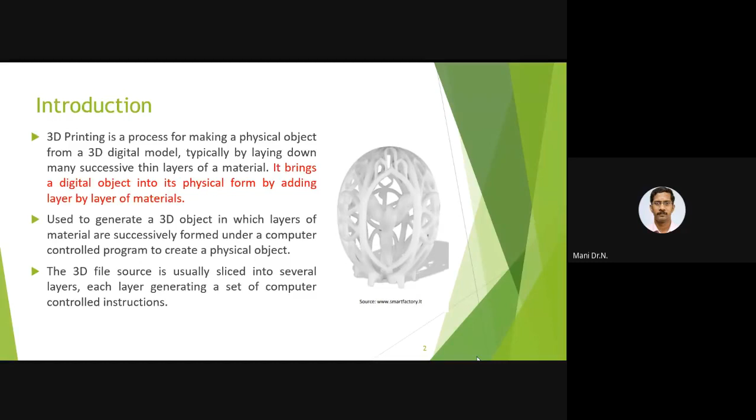Based on the code, nowadays some processes are linked with Python. Similar to what happens in finite element analysis software, where coding happens behind the screen. Whatever appears on screen, if you make a line by giving coordinates, it makes a line. The same applies here. We have to write that program, feed it to the computer, and those details will be delivered in the form of the product at the final stage.

These are possible issues while making the process. If you make any process, even in a normal mechanical engineering workshop, we face a few problems. So same way here also we have some issues.

Normally to make the product, if it is a completely closed product, you will not get much problem. If it is slanting or at some angle, we have to give some support to the part. Those are overhangs or support structures at the end of the model. After making the entire model, we have to remove those support structures, so there we may face some problems, in making the support too.

Then there's the direction in which the print is going, because we have all three directions X, Y, and Z. Normally this process will take only XY directions, because the nozzle that delivers the ink will move only in the XY direction. So each and every layer will move in the XY direction, and finally we'll get depth. So which direction it has to move, we have to give clear instructions. That is also one of the possible issues.

And if it is a hollow object, what do we have to do? We have to fill it with some support materials. We cannot do it just like that. Initially we have to decide, based on the product, what type of product we are going to make.

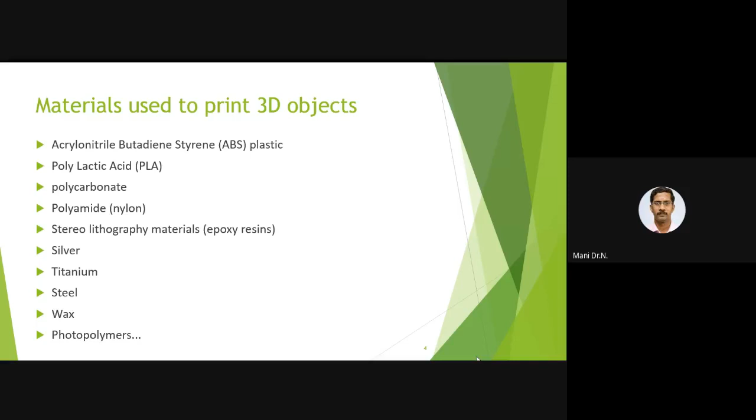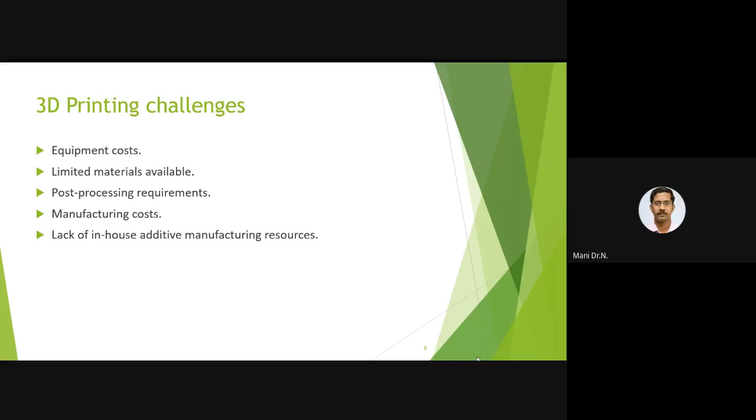Because normally with 3D printing we used to make only a single product, right? Because we need some prototype model, we used to make a single product. So for that we have to go for an entirely new setup, right? So then the manufacturing cost will be increased. And lack of in-house additive manufacturing resources is also one of the challenges.

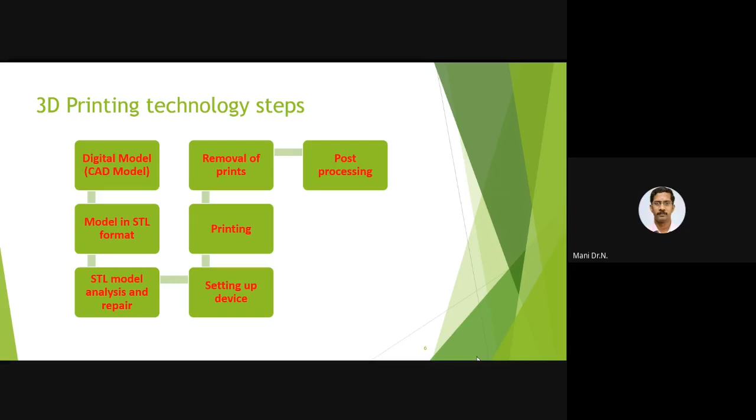And these are the different 3D printing steps we have, right? As I said earlier, we have to make a 3D model, a digital model, by using some CAD software, and those models will be converted into some file format. Here I have given STL format. We have a number of file formats to store the model. Then we have to do analysis of those stored STL models, and if there is any problem, we have to repair it. Based on that, we have to set up the device. Then we do printing, then removal of prints, removing the object from the setup, and finally post-processing. We'll see this elaborately.

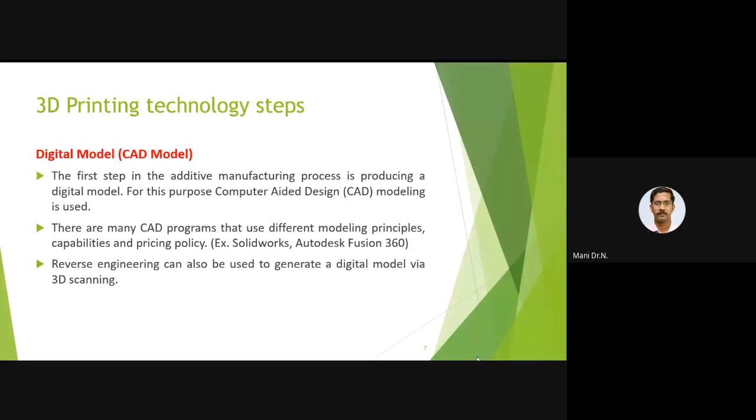Initially we have to make a 3D model, right? A digital model in the system by using software like SolidWorks, Autodesk or CATIA, whichever is user friendly to the corresponding 3D printing system, because not all software properly helps to store in the proper file format. So that also we have to check. The file format we use should be acceptable to both the system as well as the 3D printing equipment, right? So only those kinds of file formats we have to choose.

And sometimes reverse engineering can also be used to generate a digital model. Reverse engineering means from the models we can take the dimensions, and from the dimensions we can make a new model. Then the CAD model we developed using different software will be converted into some file format. Here I have given STL, that is stereolithography, which is acceptable by additive manufacturing machines or whatever 3D printing machines we are going to use. The formats must be acceptable by those machines, then only the process will be proper, right? Otherwise it will be a problem.

After converting the 3D model into STL format, we have to do model analysis. In model analysis, if there are any discontinuities, it's required to repair whatever errors we face in the STL format. While making the model, you will not find much problem, because SolidWorks or other modeling software will give a proper model. When doing analysis or when changing to some file format, only there will you face some problems.

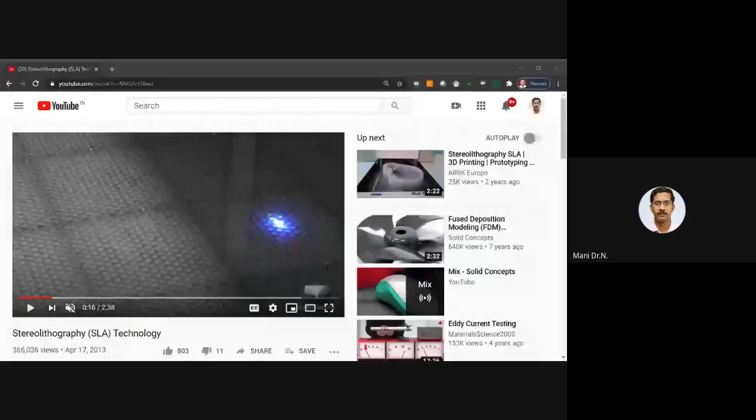One second. I think the screen is visible to you. And here, whatever I said, that will be displayed here. Yes, I have muted the sound, so you will not get any sound.

Because here the laser is pointed out. Those are the laser points to make the layer by layer process.

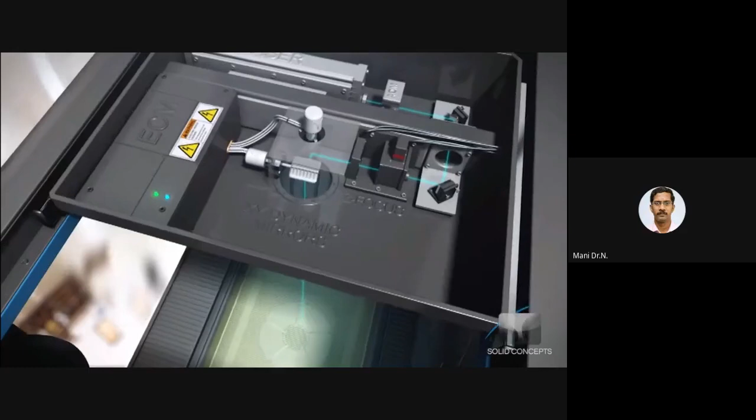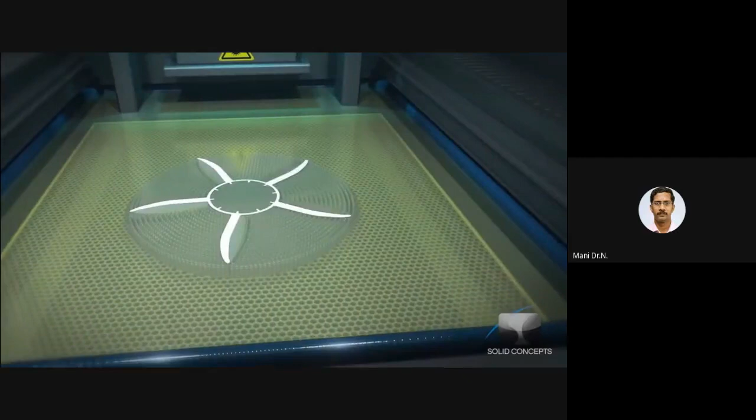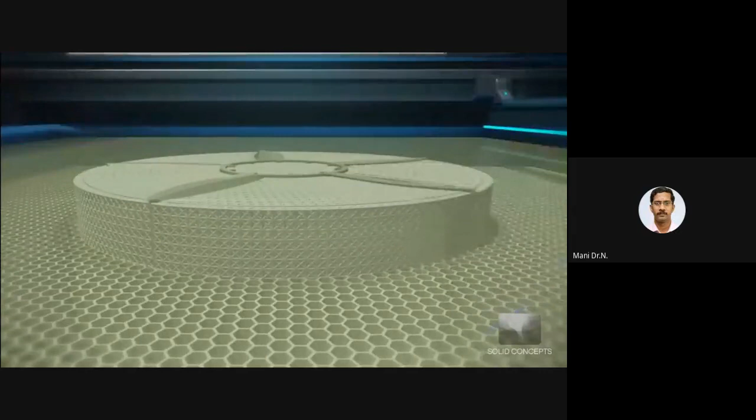That is the mirror that will be controlled by the system. Okay, wherever the laser is pointed, there we have a layer by layer. So those layer directions will be based on what commands we have given and what codes we have stored in the system.

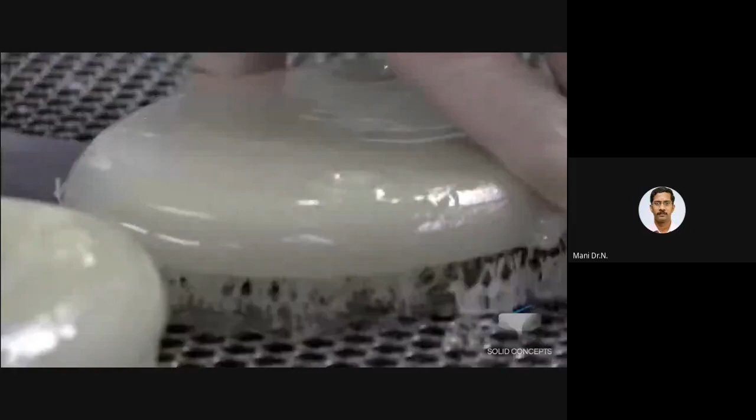Then the post processing. Right? This way, we can do the stereolithography process.

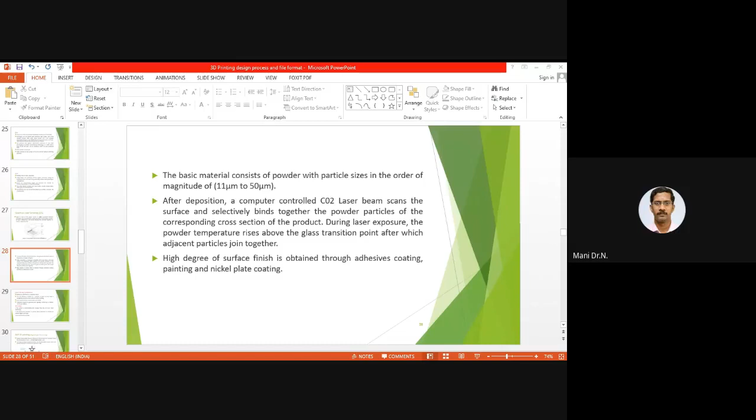And initially we have to do a heating process of this powder bin and this build platform, to a temperature lower than the melting temperature of the polymer, and the recoating blade will move in this direction after each and every layer. After the powder is laid on this platform, after each and every layer, this will move in this direction and backwards. The recoating blade spreads a thin layer of powder over the build platform, right?

Then the laser, here we are using a CO2 laser, scans the contour of the next layer. If one layer is over, it scans the next layer and selectively sinters. That means it fuses together the particles of the polymer powder, whatever polymer we are using here. And the entire cross section of the component is scanned, so finally the part will be built.

And after each and every layer, this recoater will be moved in this direction and back. Then once the rotation is over, this will lower down. This is the direction, right? This will move down one layer like this, and then the powder will be laid down here. Then the platform with the printed part will lower one step, and this way we do the whole process.

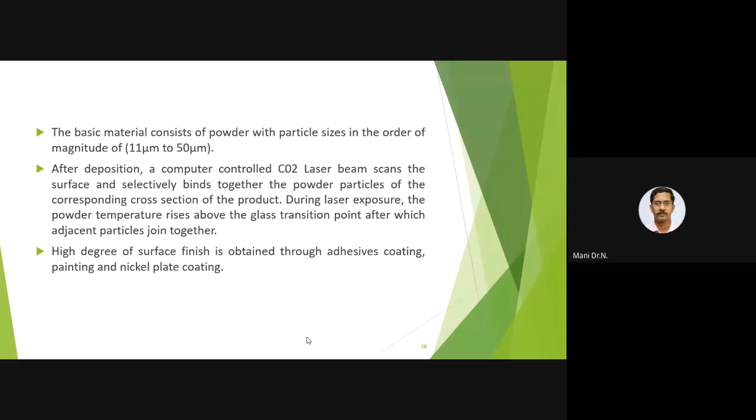Right? Then we have a few considerations. These are the considerations of this laser sintering process. The minimum wall thickness we can make is 0.6 millimeter, and this is based on powder metallurgy concepts.

So the surface smoothness won't be much, because in the earlier processes, like direct laser sintering or even the FDM process, we also have to do post-processing work, and especially in this work we are using powders, powder metallurgy concept powders. So the post-processing will be a bit heavier than the remaining processes. So we have to do some finishing process if we want to have a completely smooth surface.

So parts are porous, that is possible, and those pores can be sealed post build. Because of this powder process, because we are using powders, there may be pores at the micron level. So for those pores, we have to do a sealing process in the post-processing stages. The tolerance, depending on the geometry, is plus or minus 0.2 millimeter up to 100 millimeter.

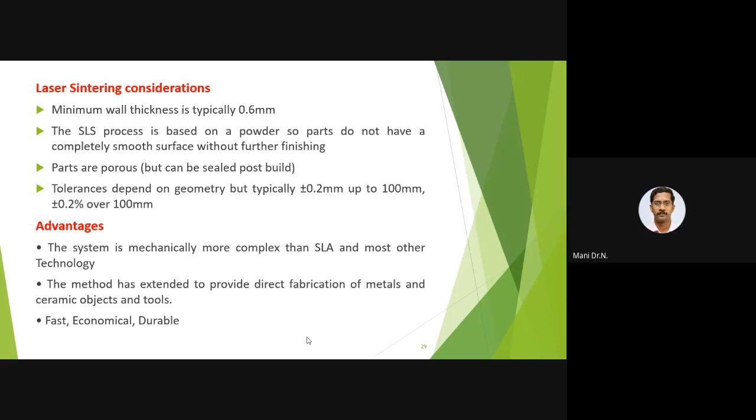And the advantage of this is the system is mechanically more complex than the SLA process and most other technologies. And this method has been extended to provide direct fabrication of metals and ceramics. So here we can make metal and ceramic objects and tools. In earlier processes we cannot use metals, so only a few methods allow metal 3D printing, right? So it is a fast, economical and durable process.

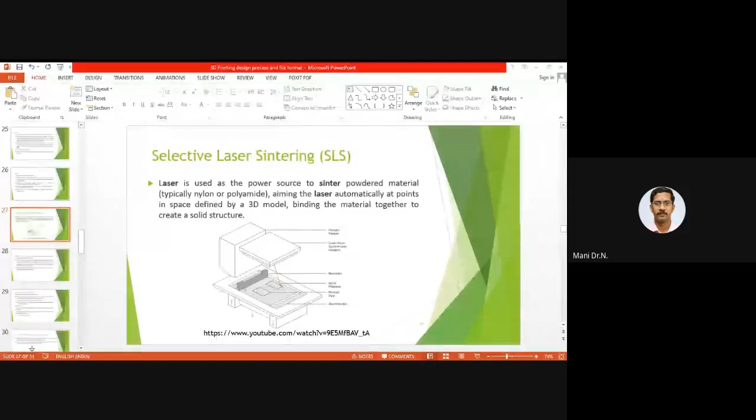I'll play the selective laser sintering process. Yeah, this is the selective laser sintering process. So these things are available, and if you see this kind of video along with the lecture, you can easily understand. That's the aim of the session, I think.

See the horizontal bed moving after each layer. Yeah, once one layer is over, the bottom platform will automatically go down and this horizontal bed will move. See the process. It automatically goes down, then this horizontal bed will move.

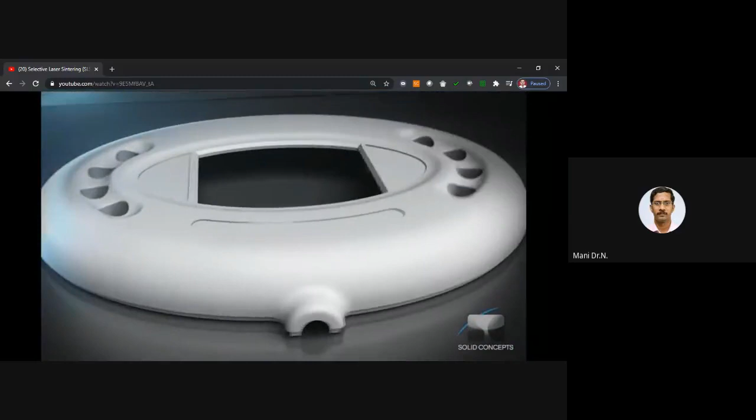Sir, sorry to interrupt, but nothing is visible on the screen. Oh, sorry. I think it's visible. One second. The previous video was visible, right? Yes, sir. Previous was visible, but now it is not. Okay. Now it's visible. Sir, not yet, sir. I think now it is visible. Yes, sir. Now it's visible. Okay, thank you. Maybe Google did it automatically. There was some problem. Yeah, I detected that.

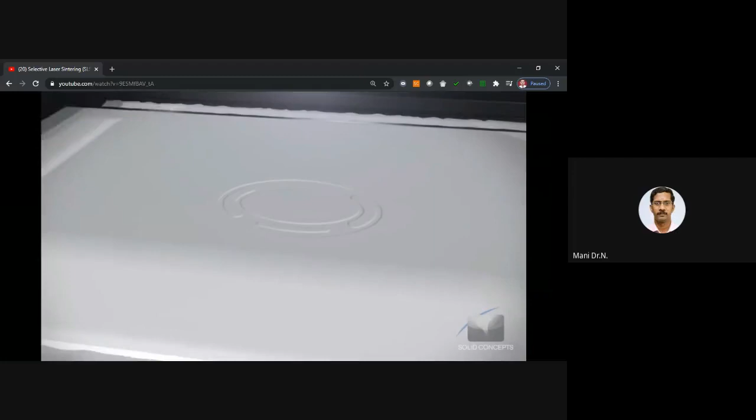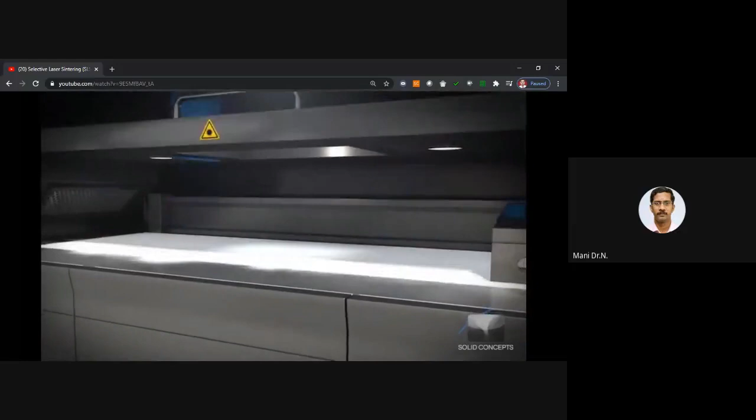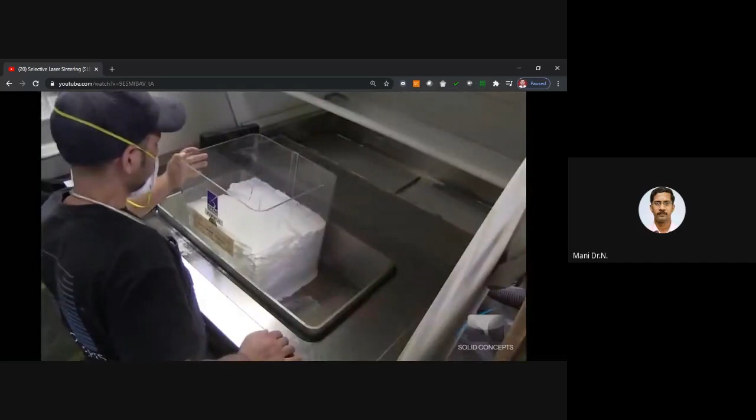So this is the actual SLS process. The sound I have muted, so just look at the process, how they're making it. Once a particular layer is made through the laser sintering process, the horizontal feeder will automatically move, and at the same time the platform will lower down. This is repeated till the product is made. So this is the product. And the remaining powder we can use for the next product.

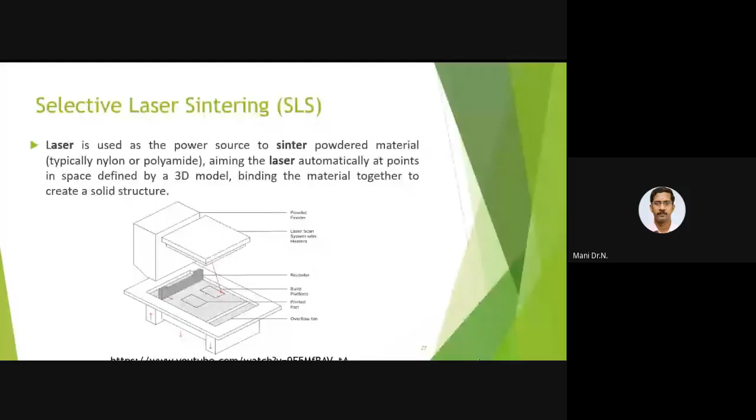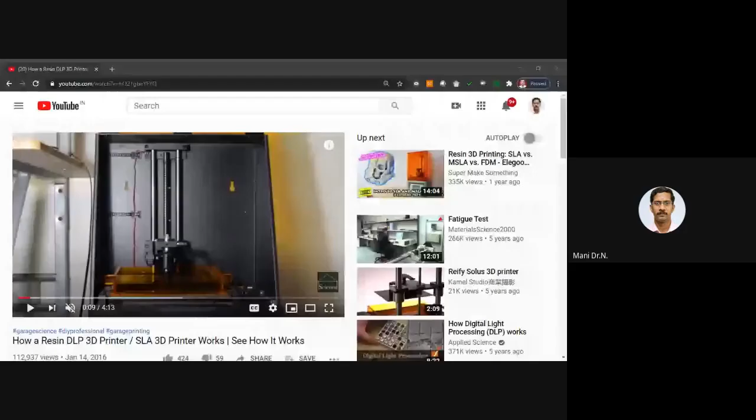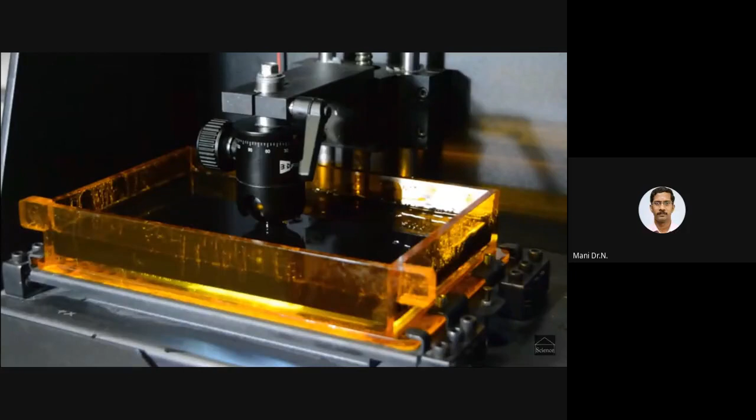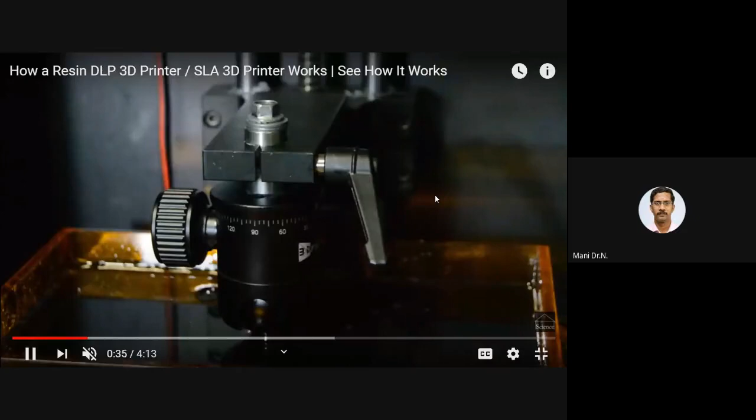And this is the DLP 3D printing process. Here we have full of resins, that is photopolymer resins. Those resins are in liquid form. When the lasers are pointed at them, they will automatically solidify.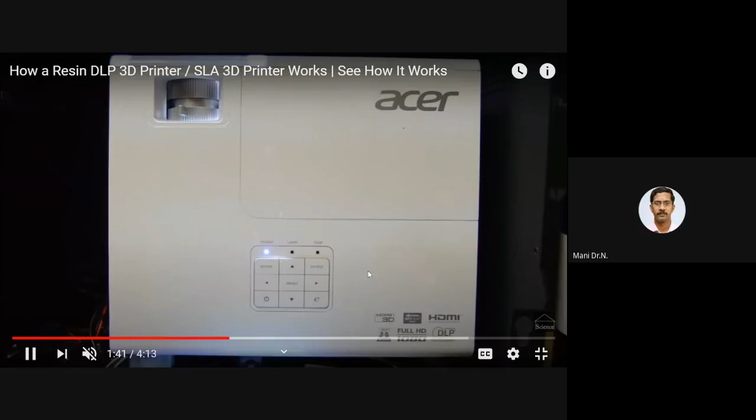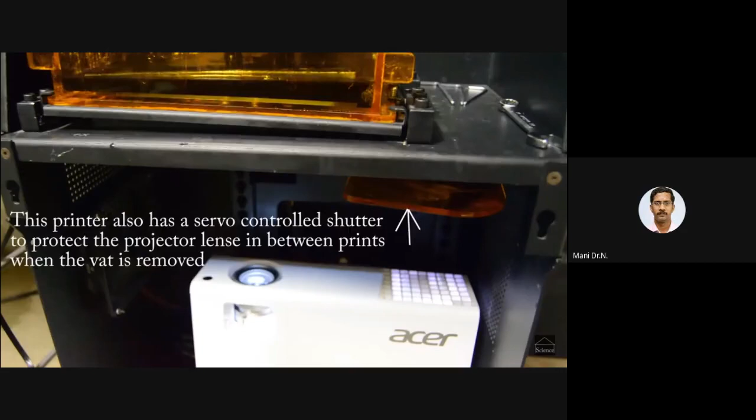See, the lasers are pointed out. The projector lens.

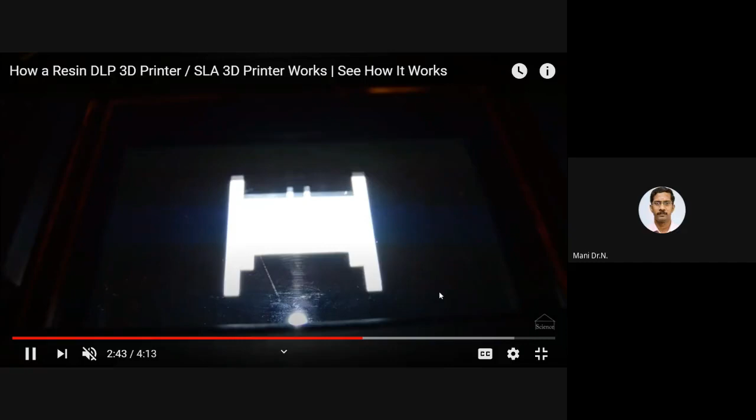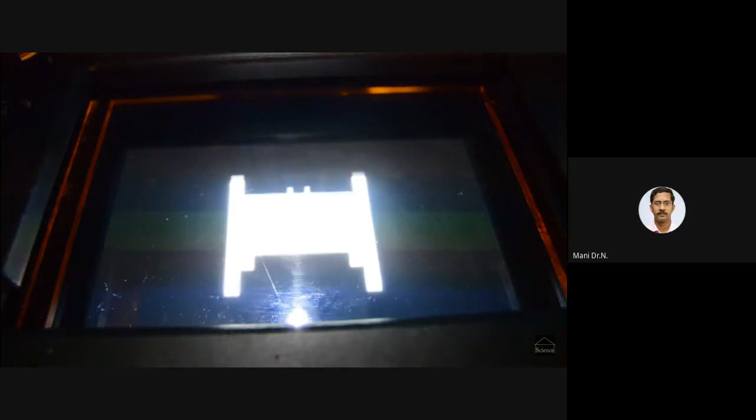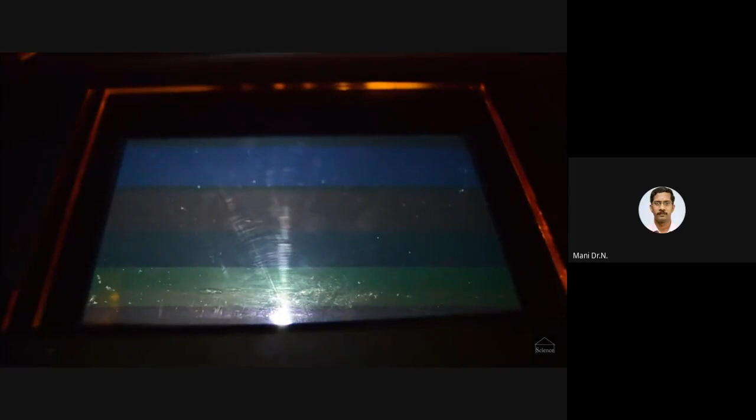Here the product is made by pointing the laser on the resins. Those laser pointers are based on the codes we stored in the AM machines, right? So whatever model we made using 3D software, that model will be entirely produced by using this kind of process.

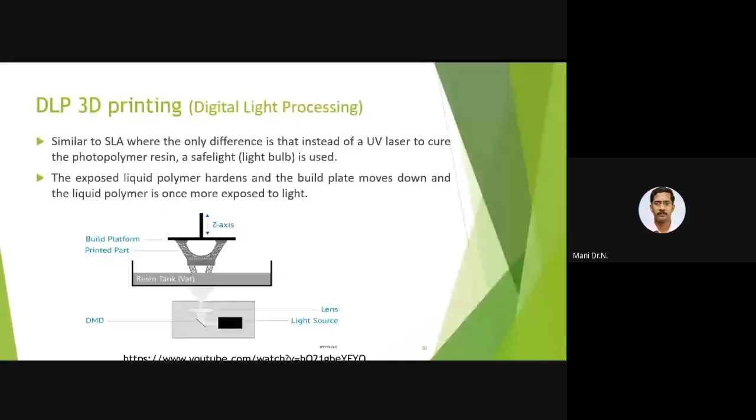And then we have photopolymer phase change inkjets. This is the same as an inkjet printer. Here we have PolyJet technology. It's again a photopolymer-based technology. Earlier we used photopolymer resins. We use layer-wise deposition to create objects and support materials using an inkjet head. So how are inkjet printers used, right? Color printers print one layer based on the colors we give as input to the printer. This is used to produce very accurate and smooth components and prototypes.

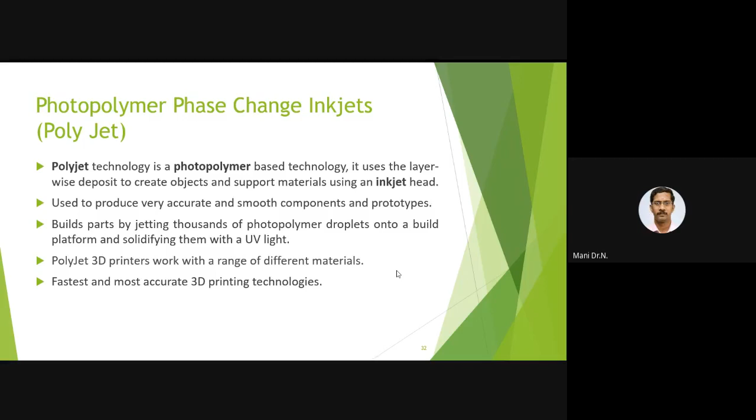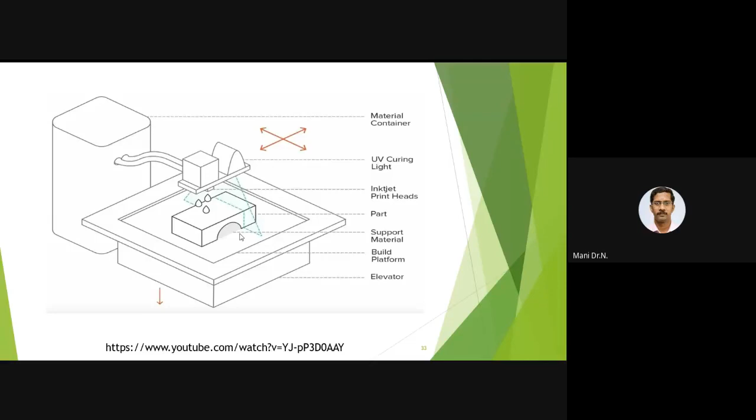Then we have the direct metal laser sintering process, and this directly creates metal parts. This is one process for metal 3D printing, because, as I said, we cannot use all the processes, since a number of processes are used for plastic. So this is one method we can use for metal 3D printing.

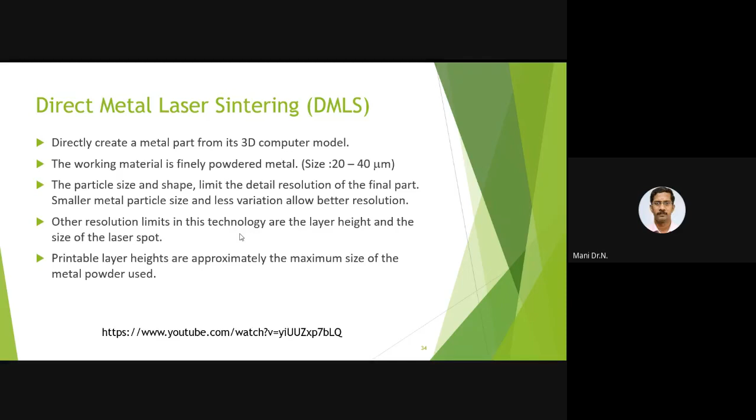The work material is finely powdered metal, size 20 to 40 micrometers, and the particle size and shape limit the detail resolution of the final part. And the printable layer height is approximately the maximum size of the metal powder used, right?

And this is the schematic of this DMLS. This does not melt the metal powders, so we require less energy for this, because this is also in the form of powder, and sintering heats the particles enough so that their surfaces weld together. And initially we have this build platform, the same concept, right? So here we have build piston, here we have build platform, and the laser source.

So here we are pouring some powders, and the source will be directed over the surface. And this is the X-Y scanning mirror, and the laser beam will be produced from this. And this is the metal powder supply. So from here the powder will be supplied. So initially, a thin layer of this metal powder, either aluminum or titanium powder, is spread over by this roller or recoater, right? So it will be placed by this recoater.

Then immediately after, the print chamber of the 3D printer is heated up. The powder melts when it reaches the melting point. So the entire process will be heated up, right? When we pour the powder, at the same time the laser will be pointed there. So automatically that place will be heated up. Then automatically we made the first layer of the process, right?

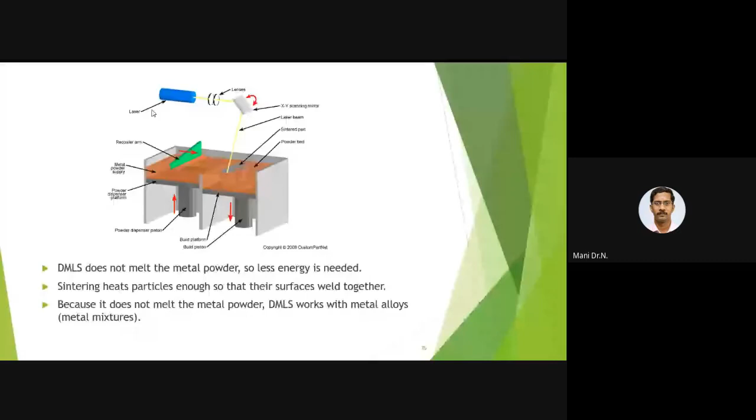Then we have a plaster-based 3D printing process. This method uses a bed of small plaster particles. And here we have liquid adhesive supply and multichannel inkjets, and here we have nozzles to drop liquid adhesive on the platform. The concept is the same as the previous process. So when we made a single layer, automatically the platform, the build table, will be lowered down.

And especially this plaster-based 3D printing process requires two different substances. One is the powder substance, either plaster or starch or gypsum, anything you can use. And the other is inkjet, right? And this plaster is a mixture of dry powder with water to make a paste that will be available in the liquid adhesive supply. And we have to supply some heat or air to the paste, evaporating a certain amount of water, which causes the paste to harden.

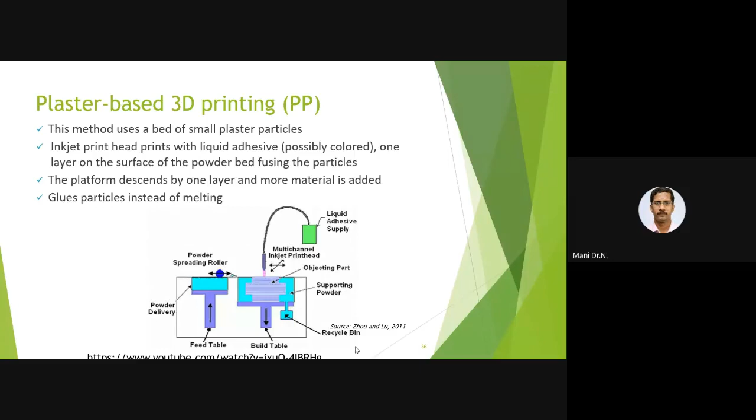This we can use for artistic projects, same as the previous process. And the platform descends one layer, right? It glues particles instead of melting. There's another process.

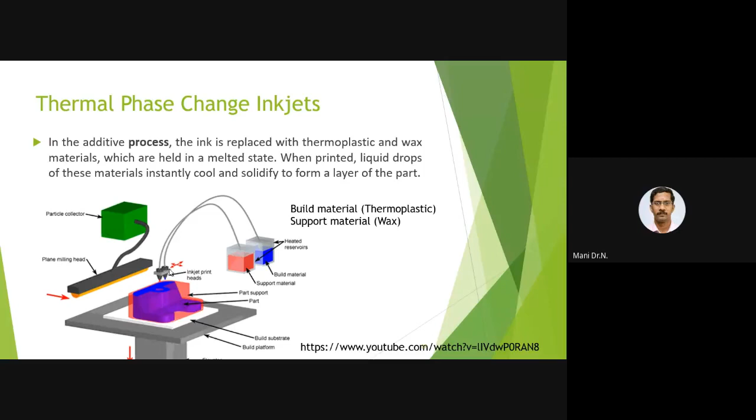When printed, liquid drops of these materials are instantly cooled and solidify into the form of a layer of the part. The particle collector and plane milling head cause this automatically to cool and solidify. Through this solidification process, the first layer automatically gets completed.

This characteristic of inkjet systems is the ability to produce extremely fine resolution and surface finishes, essentially equivalent to CNC machines. This technique is very slow for large objects. The application-oriented articles, particularly jewelry, can be made using this.

These are the file formats we have, and these are the processes above. Whatever we discussed is making the 3D model product using plastics or metals. A number of processes use laser to make the product, because the material we use to make the product is in the form of liquid. A few processes we discussed.

In those processes, when we point the laser, automatically the liquid resin gets hardened. In a few processes we have powders, which get hardened by a light source. In a few places, the powders we apply get hardened by air. And in a few, we make it layer by layer.

So these are the different processes we have to make a 3D product or 3D printing process. Out of this, you can choose any process based on your product or application.

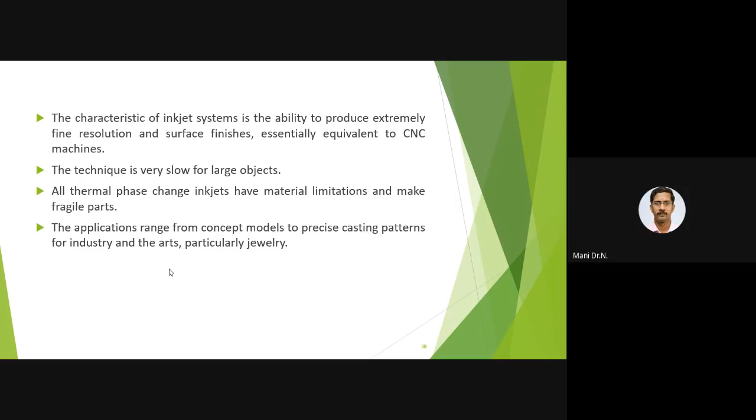And these are the few file formats we have. File formats are especially meant to store the digital model. Whatever digital model we make using 3D software is stored in the form of file formats. Those file formats are then converted into G-codes. So the file format decides what information goes to the 3D printer. This is only the design factor—the bridge between the AM machines and the system model.

So this only decides what information goes to the 3D printer, and based on this, the 3D printer makes the product. So all of this we discussed are only the processes; those processes we have to give before the process. These are the file formats. To print any 3D object, it needs a digital blueprint of the object.

These file formats are just files that store all the relevant data about the object, such as geometry, color, texture, or materials. Those details are stored in the file format. There are several file formats that can hold such data. Examples given are STL, OBJ, AMF, and 3MF—these are the few formats we are going to discuss today. Apart from this, there are a number of formats out there, but these are the widely used ones for 3D printing, and they are a subset of 3D file formats used for 3D printing.

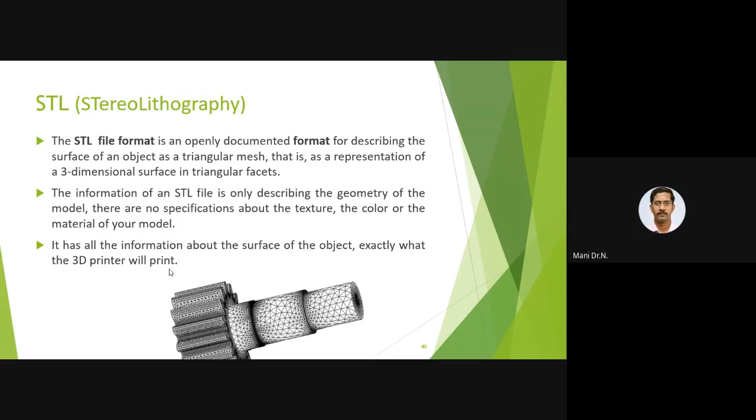Here we have two types of coding: one is ASCII coding, another is binary coding. This is how the STL file will store the format and the data.

The format works like this: we give a solid name for whatever solid we are going to make, and that name will be the name of the model. It continues with the number of triangles, because the data is stored in the form of triangles only. This ASCII encoding will store only in the form of triangles.

For each and every triangle we have to give: the normal, NI, NJ, NK, and all the vertices 1, 2, and 3. So we have 3 points, 3 nodes in the triangle, and we have to give all the coordinates of the vertices. Vertex 1, that is point 1, node number 1.

What are the x, y, z coordinates for node 1? Node number 2, what are the x, y, z coordinates? Node number 3, what are the x, y, z coordinates? So the entire object is stored in the form of this ASCII coding.

Then endloop, then endfacet. Each number is a floating point number. It ends with endsolid name. So we have to start with the solid name and end with the solid name. This is the ASCII encoding steps.

Another file format is binary coding in .stl format. This starts with an 80 character header, and each triangle is then represented by 12 32-bit floating point numbers. So first is 80-byte unsigned, the 80 character header, then a 32-bit unsigned integer for the number of triangles.

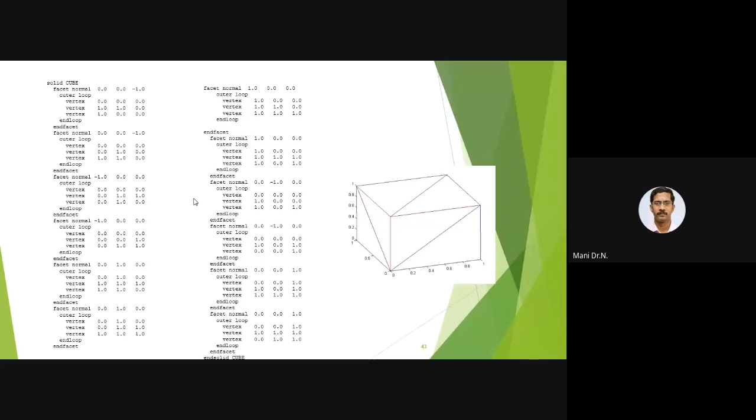This is the ASCII coding example, so this is the cube we made by using this code. If you type this code, this cube will automatically be made using it. Since we don't have much experience with this, but automatically this STL format will store the model in this form.

The next one is OBJ, the object file format. This OBJ file format is a simple data format that represents the 3D geometry alone. That means the position of each vertex, the UV position of each texture coordinate vertex, vertex normal, and the faces that make each polygon.

Here, apart from geometry, we also have texture. It supports both human readable and large file sizes, and both encodings. Here also we have both encodings, but apart from geometry, we have texture also here, whereas in the previous case we have only geometry.

Whatever model we made, the same thing will be printed using the 3D printing process. This OBJ file can encode a 3D model's geometry along with remaining information: textures, color, material.

And this 3D printing process file format also lets you store color and texture information. All this information can be stored in the format of material template library, that is MTL format, with the file extension MTL.

It is a different file format, storing what things we can in the file format. The earlier format only had geometry, and here we can save all the colors and all the geometries. Especially color details like ambient color, diffuse color, specular color, transparency are there in the material template file. This also supports texture maps, which is a more convenient method of specifying colors, because texture is used to specify color differences, so by using texturing we can easily identify the colors.

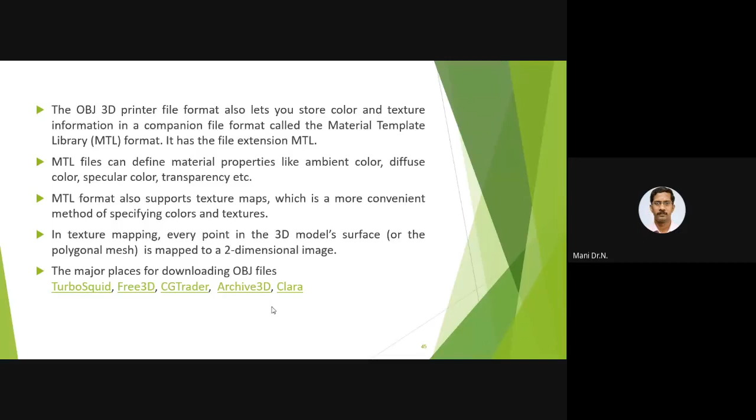In texture mapping, every point in the 3D model surface is mapped to a two-dimensional image. These are the OBJ files we have, available free on Google, on sites like TurboSquid, Free3D, CGTrader, Archive3D, Clara. You can download any OBJ files and make a model. The website itself lets you make the model, using any browser. This is the wavefront object file.

This is another format, the additive manufacturing file format, AMF, introduced by ASTM. ASTM is the globally accepted coding institution. Those codes are presently used in all areas, including medicine. Most places use these ASTM standards. This manufacturing format was introduced because we already have a few problems with STL.

And the previous OBJ format, right? Those problems have been addressed and rectified a little bit, especially to alternate the de facto industry standard STL file format, because STL only used geometry. So here they have used other details also, like material, texture, constellation, and metadata.

And especially this is optional. The element defines the image texture, color assignment, what color we assign to the design. And metadata is the element that describes additional information about the objects. Whatever additional information is needed, this AMF file format will give a solution. This file format is easy to read, write, and process.

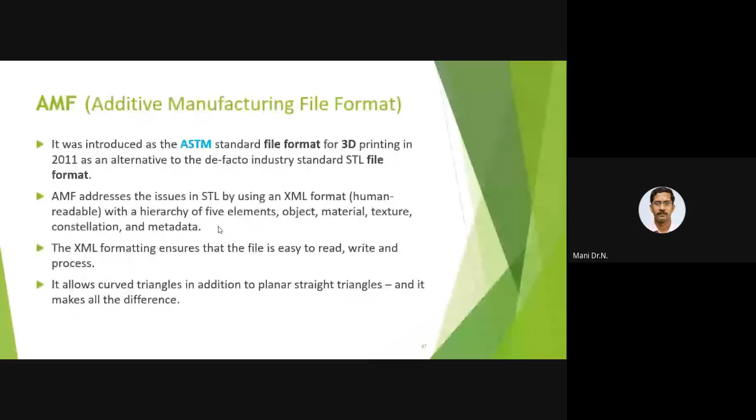In STL we have only straight triangles, but here we have some curved triangles in addition to planar triangles, which makes a difference. Earlier in STL format, we made only the geometry with straight line meshes and triangle meshes. Here they give provision to make materials, texture, constellation, and metadata, providing more information about the objects along with curved triangles. If you use curved triangle meshes, the accuracy will be more, because a few problems can be rectified using this kind of process. This is the curved triangle, and these are AMF 3D files.

This will be linked with software, because whatever file format we use will be supported by the machines, as the machines only receive G-codes, whereas all the file formats should be supported by the software used to make the model. So these are the few 3D file formats used by the following softwares, this AMF.

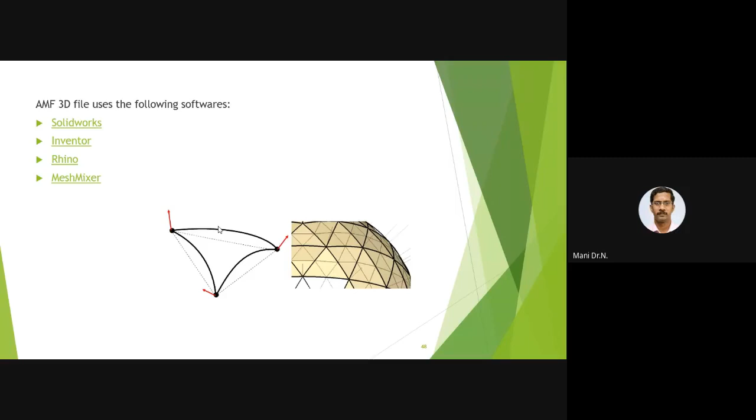And finally we have the 3MF, made by Microsoft. So the problem with the previous ones, AMF and 3MF - AMF was made by ASTM standards, and while they are well versed about all the standards, they did not discuss with major industries. They made their own format and delivered it. That is one drawback of AMF, because it is not much used by software, as most 3D software don't support it much.

Whereas this 3MF file is developed by Microsoft, and is the standard file format published by the 3MF Consortium, an XML based data format designed especially for additive manufacturing. Because what they did is discuss with a number of industry people - that is the main thing. Apart from making the codes, they have to discuss with industry people, then only they'll accept it, or whatever problems they're facing can be modified. They included all those corrections, information about materials, colors, and other details, whatever the industry people require.

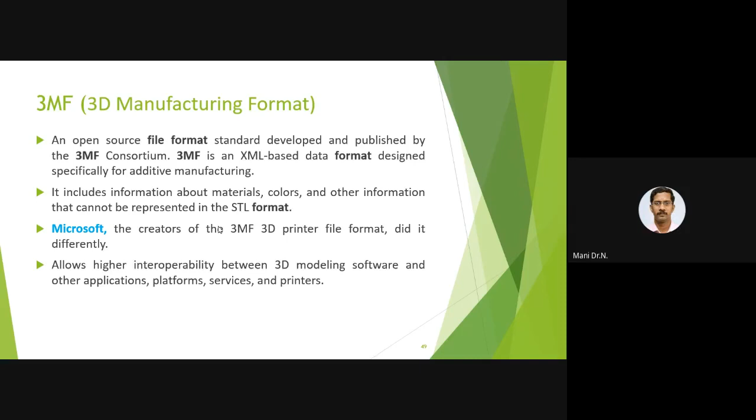They have included almost all of it, and they're dealing with almost all the software. This 3MF printing format is almost a worldwide standard at present, because they deal with all the software people like CATIA, ProE, SolidWorks - all are dealing with this 3MF format. That's why it is almost user friendly compared with the remaining three formats, OBJ, STL, or AMF, because we are working with software to make the 3D printing, with higher interoperability between 3D modeling software and other applications and platform services. That is the main advantage of this 3MF format.

And this 3MF gives completeness - all the necessary model, material, and property information is contained in a single archive.

That is the main advantage of this 3MF. And human readability: common structures such as OPC, zip file, and XML are used to ease development. And simplicity: it's very short and clear, making development easy and validation fast. And extensibility: because of this XML, we can extend it. And no ambiguity: clear language and conformance tests ensure a file is always consistent from digital to physical.

That is the main thing, right? Without any problem, without any ambiguity, we have to move the file from the digital data. That digital data we have to convert for the AM machines. So that is the main thing. If you face any problem there, that will again be a problem. So this 3MF will overcome all those problems. That's why I said it's user friendly.

Access to and implementation of the 3MF specification is, and will always be, free of royalties, patents, and licensing. And out of these four file formats, this 3MF is the most user friendly. It overcomes almost all the problems faced with previous file formats. And it bridges easily between the digital data, that is a number of softwares, and the AM machines, that is 3D printing machines, right?